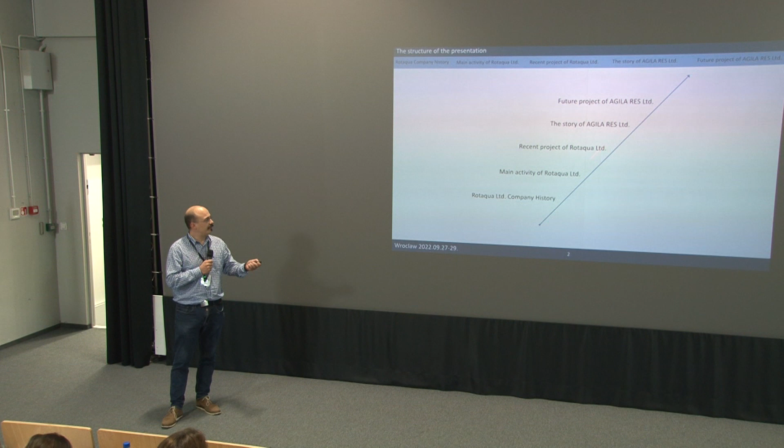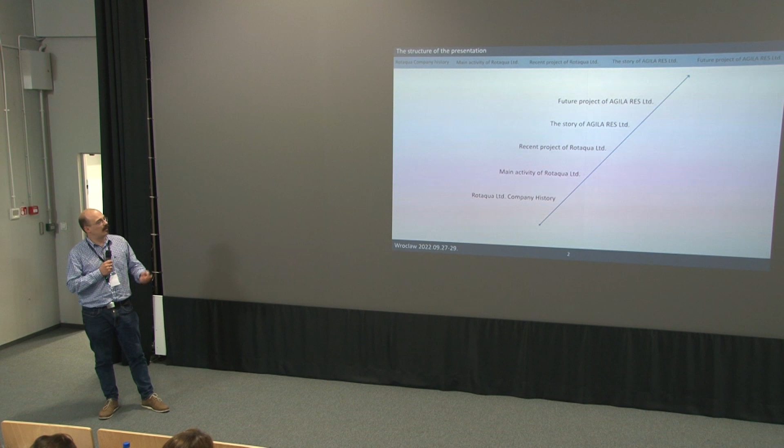So let's talk about the structure of the presentation. First I will talk about the ROTAQUA company, the drilling company, about the main activity of ROTAQUA and the recent project, and later on I jump onto the story of AGILA Renewable Energy Service, the future project of this company.

So, this drilling company is a kind of old company. In the mid-50s, in the southwest part of Hungary, in the Mecsek mountains, a uranium ore was found related to Permian sandstone. So they dug the first mining shaft until 120 meters depth, and they started the extraction, the production of the uranium ore in 1956. Later on, several other mine shafts were built in the area, and the deepest point of the mine was more than 1.5 kilometers depth from ground level, so it was a huge and deep mine.

Of course, the mining was running, but there was need for exploration as well. That's why they founded a drilling company for exploration. They worked underground and on the ground, mostly in the Mecsek mountains, but they had several other drilling points across the country, especially where they knew that there is a similar Permian sandstone in the depth.

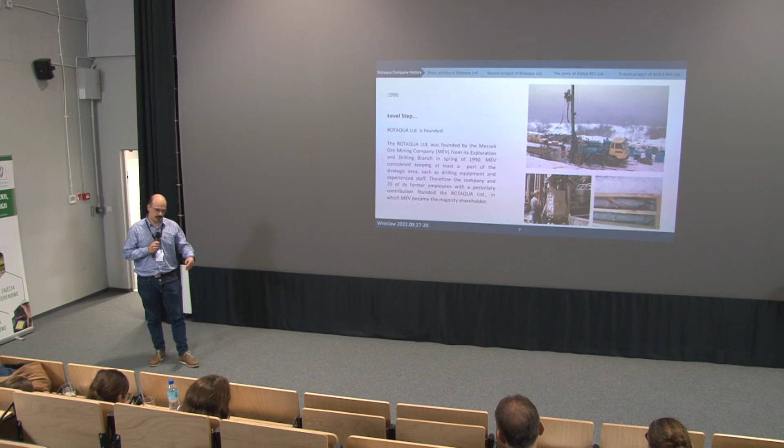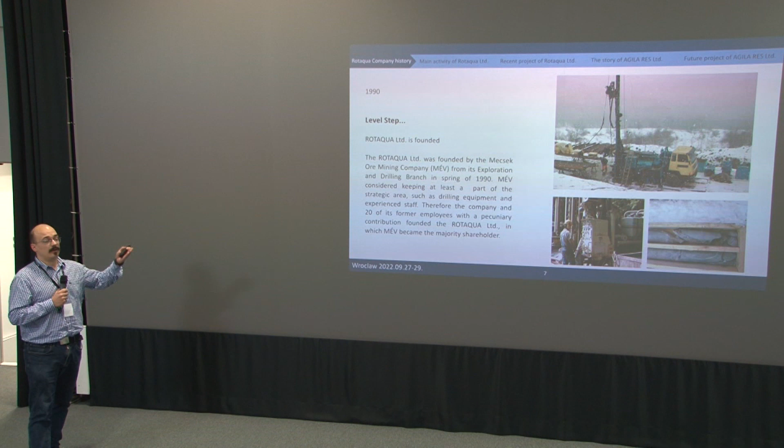And the regime change arrived in 1990, so the mining company partly privatized the drilling company because they didn't want to put a lot of money into this company. So with the help of some former employees, they founded ROTAQUA Ltd. Still they got most of the orders from the mining company, but they were already open for other businesses, and they already got orders from the water industry. In 1996, the person who is the owner today bought the whole company 100%, and parallel with this, the uranium ore mine was closed.

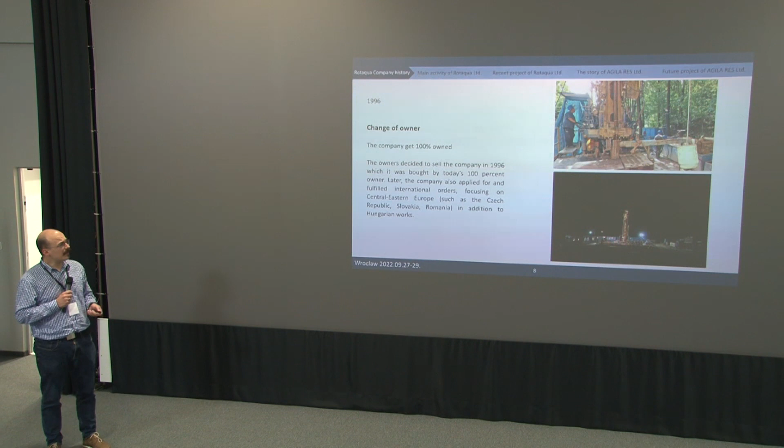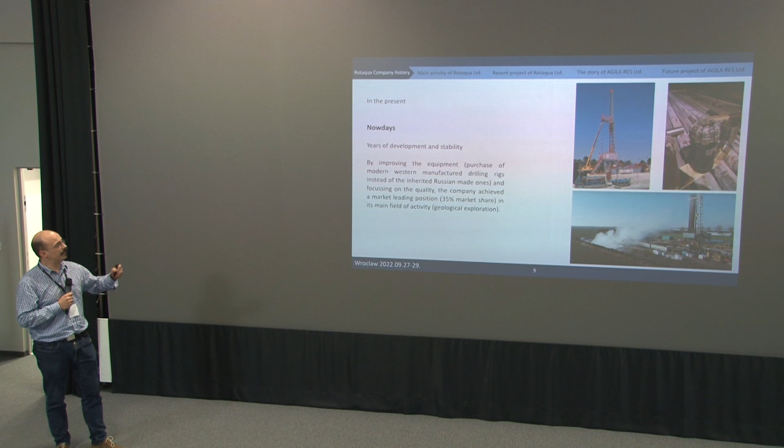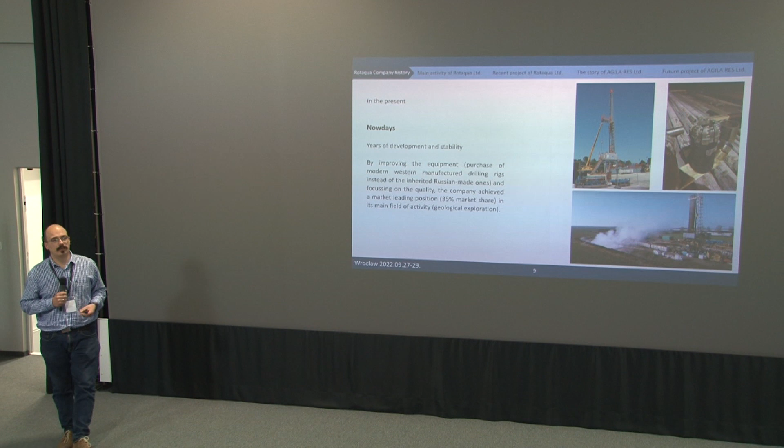He opened the market. He started work abroad as well, mainly in CE. The biggest projects were in Romania and in Czech Republic, but some Slovakian and Serbian projects were running as well. The most important leg was the core drilling, but they started to open for some other businesses, and nowadays the main focus is on deep geothermal projects. They started to buy newer and newer drilling rigs, so nowadays they can run the projects faster and more precisely.

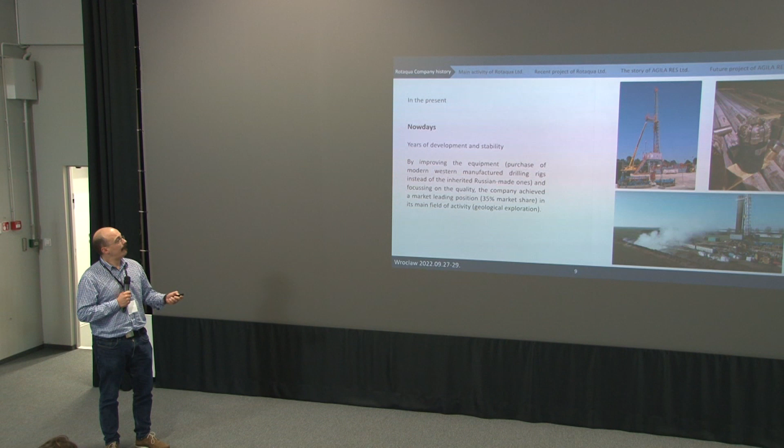Some words about the main activity of ROTAQUA Ltd. The two most important are the completion of geothermal wells and structural geological exploration drilling, or core drilling. At the beginning of the 2000s, on the east side of the Mecsek mountains, they started to build a low and mid radiation radioactive waste deposit into granite. In the exploration and implementation phase, ROTAQUA has a main role on ground and underground as well. The company also sometimes does environmental and geotechnical drilling, and we have an engineering department.

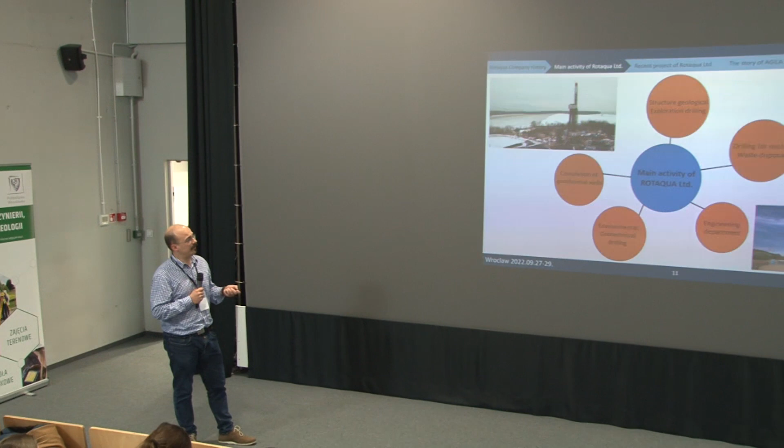Some words about the recent projects. From 2020 until 2022, there was a research project on the west side of the Mecsek mountains, for a high radiation radioactive waste deposit. The depot was built in Permian claystone, and our company did the drilling campaign. During 1 year they drilled 3 boreholes.

The first borehole from ground level until 800 meters, core drilling all along. The second from ground level till 1930 meters, core drilling all along. And the third one was tricky because from 0 to 800 it was full section, and from 800 till 1,300 meters it was a core drilling well. It was a very successful campaign and story. We joined together with different companies who did other measurements, such as geophysical measurements like wireline, and hydraulic well tests and so on.

And as we know, you talked a lot about earlier, geothermal energy is more and more important. The governments and the investors start to realize it, slowly but surely. And the Pannonian Basin in Europe is a pretty good place to run these projects and drill these wells.

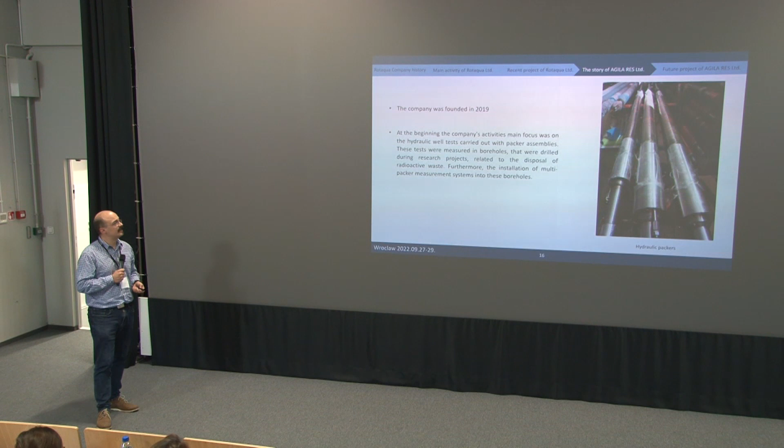And now I will have some sentences about AGILA Renewable Energy Services. The company was founded in 2019. The main focus of the company is on hydraulic well tests in water wells and in geothermal wells as well. Just some words about this hydraulic well test. Maybe some of you do not know a lot about that.

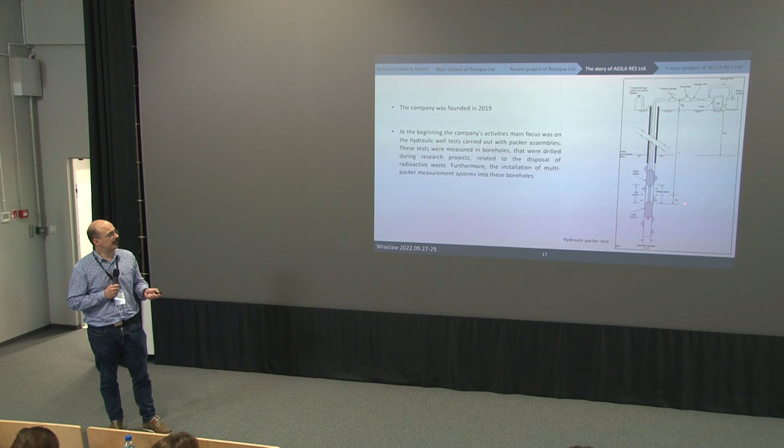So we usually run in the hole with a tool with two packers. The packer is a kind of balloon which can be pumped up by water or by nitrogen gas, and we can separate and choose a layer. Here on the pipe you can find a shut-in valve, so you can hermetically separate the testing layer.

During the test, you can measure the pressure, and the software is painting a pressure curve. So you shut in the valve. After you get the pressure buildup of the layer, you open the valve again, and it drops.

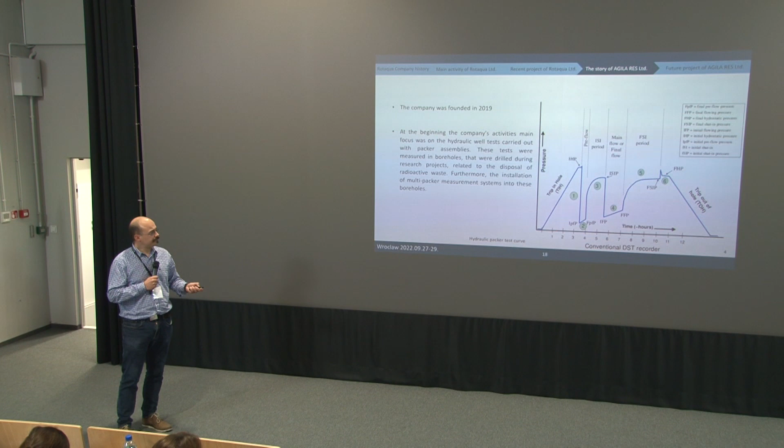After that there is inflow, the water inflow, then you close again, the pressure builds up again, and you open and trip out of the hole. And from these pressure buildups, you can calculate the size of the reservoir, the permeability, porosity, etc.

In the last year, our company was broadened with a mudlogging unit. This unit works together with the drilling rig and evaluates the geothermal boreholes. We bought it in the last year. It has already served at 5 holes.

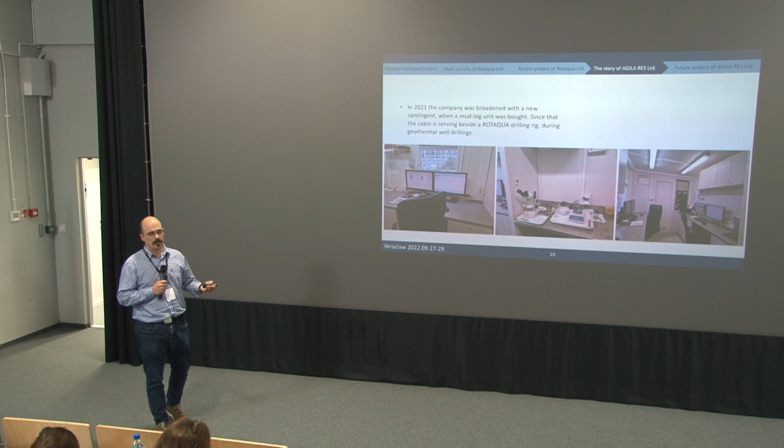Our crew has pretty good experience. They have between 10 and 20 years of experience, mostly from the Carpathian Basin and from the Middle East. They serve there as field geologists, and they are responsible for all of the measurements, for the data gathering, for the equipment.

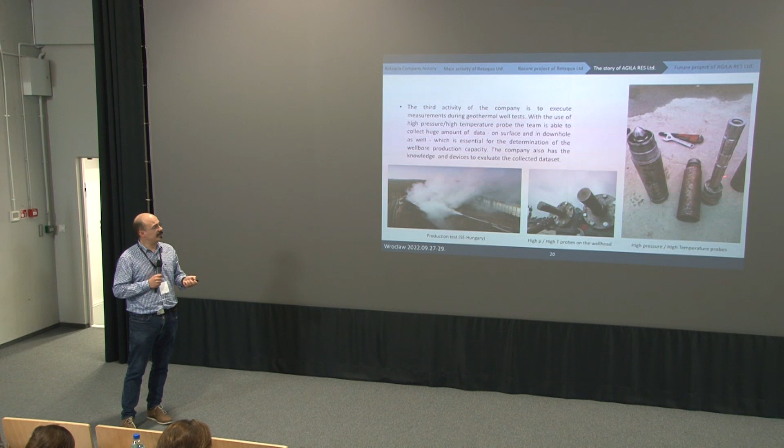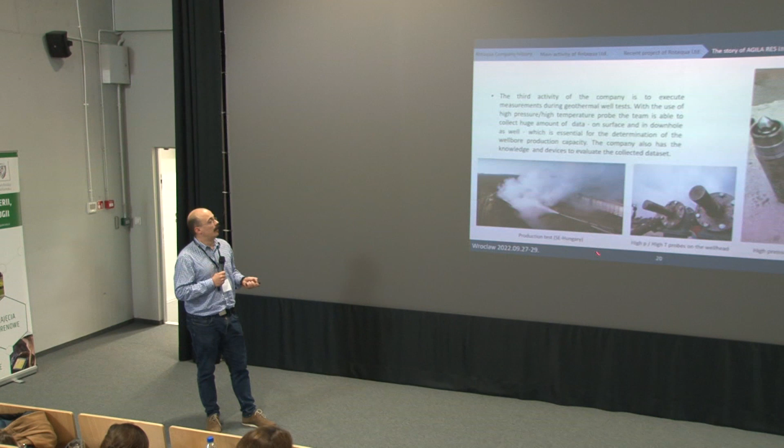And as I mentioned earlier, we can run that hydraulic test in simple cold water wells, but we can do it in geothermal wells as well. We have several probes that look like this. We can measure with them up to 1,400 bars and 200 Celsius degrees at the wellhead and the bottom hole as well. So we can carry out similar pressure buildups as I showed earlier on geothermal wells as well during well tests. This test is running in Southeast Hungary.

In a future project of ours, we will probably install a multi-packer system. The multi-packer system is a packer system, but not 2 packers, but 3, 4, 5, and more, with separated layers. Each separated section has a probe in it, which measures the pressure change in that section, usually for 15 or 20 years. They are connected to the surface, so you can check the data daily, monthly, yearly.

We will probably install a multi-packer system in the low and intermediate level radioactive waste repository I mentioned earlier. It was built in the beginning of 2000. We have future projects in the geothermal business in Hungary and Slovakia, probably in Slovenia as well. And hopefully we will assist and work together in a successful brine risk project with you.